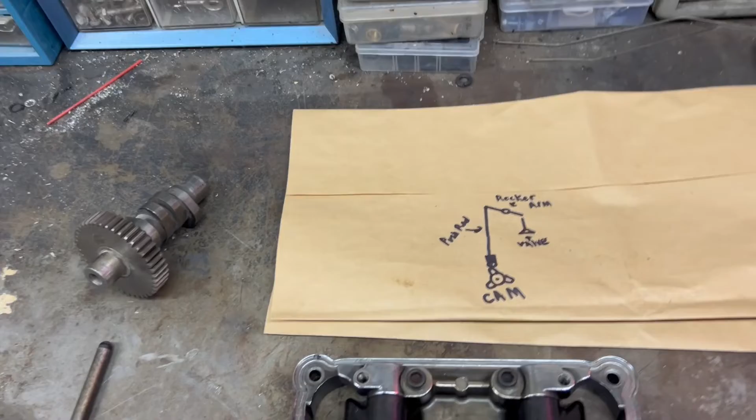Going over the basics here with this very crude drawing, you have your camshaft, and these are the lobes of the camshaft. You have intake lobes, exhaust lobes, intake lobes, and another exhaust lobe back here.

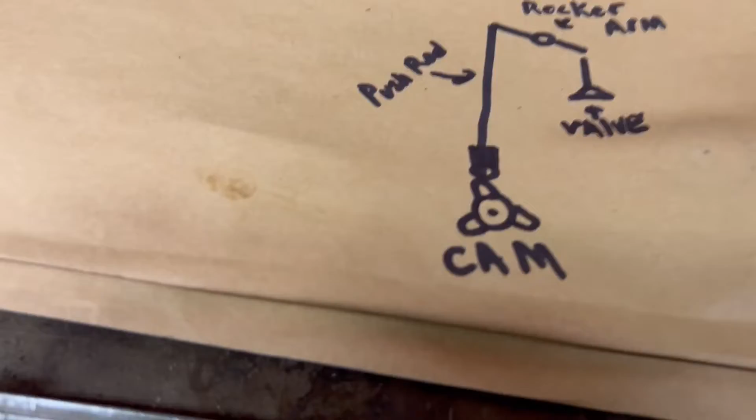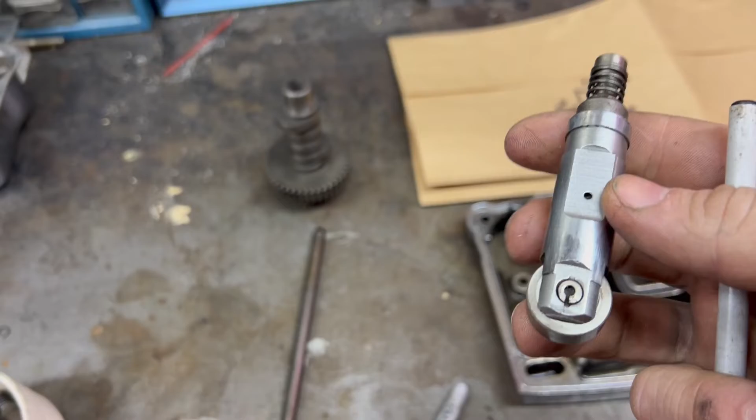As your engine spins, the cam will come up onto a lobe, whether it's intake or exhaust. What rides on the camshaft is your tappet or your roller, and it will ride on this as it spins. This sits in the lifter block and it will go up as it comes up on one of those lobes, which pushes your push rod up right here.

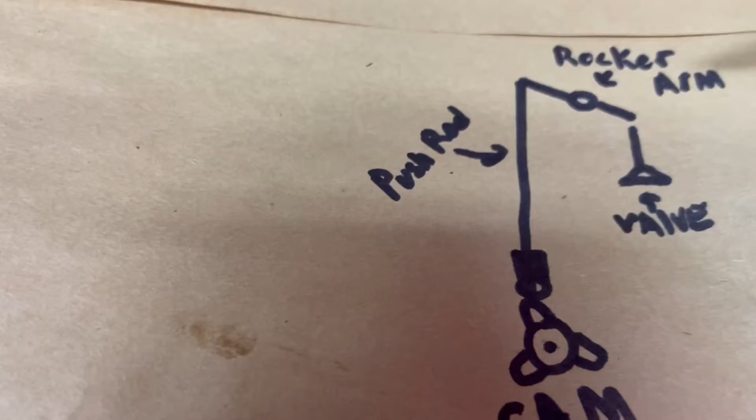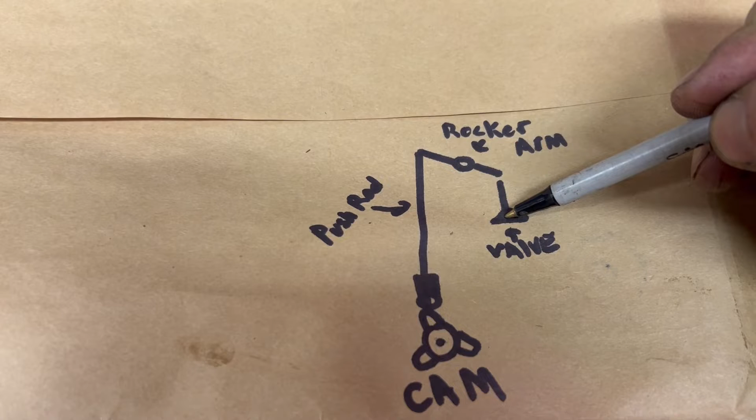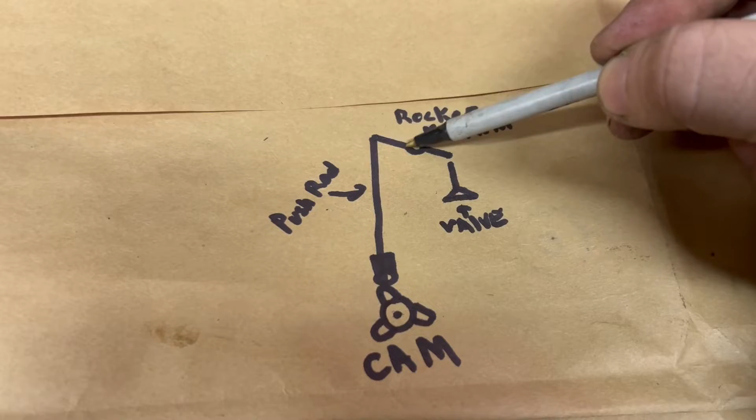So the cam comes up, pushes this up, which in turn pushes this up, and then it goes to your rocker arm inside your head. When this comes up, it pushes this down, which opens your exhaust or intake valve. Then as it comes off the lobe while spinning, it works in reverse, sending the push rod down, the rocker arm down, the valve up, and it repeats.

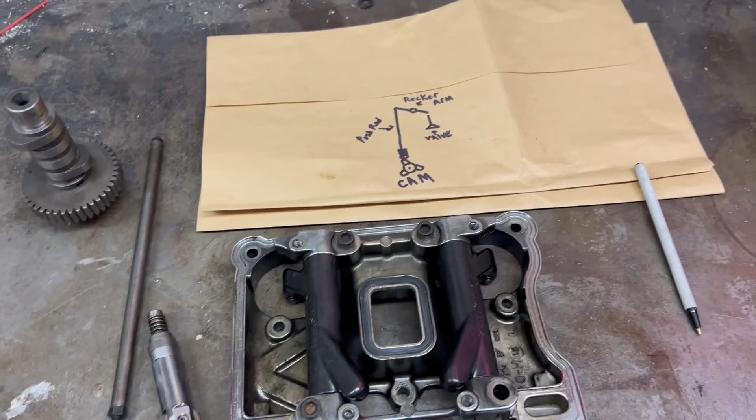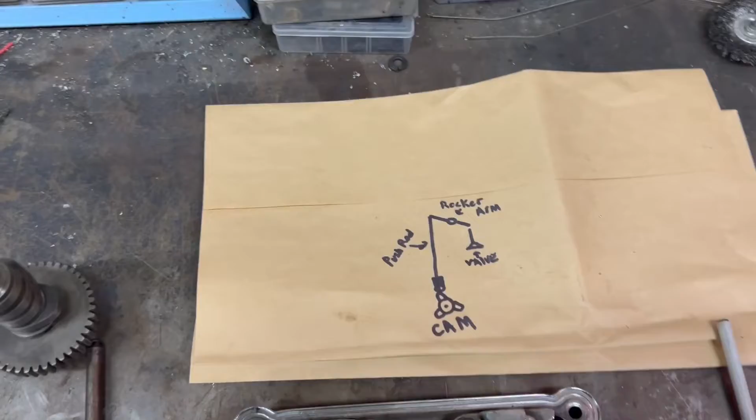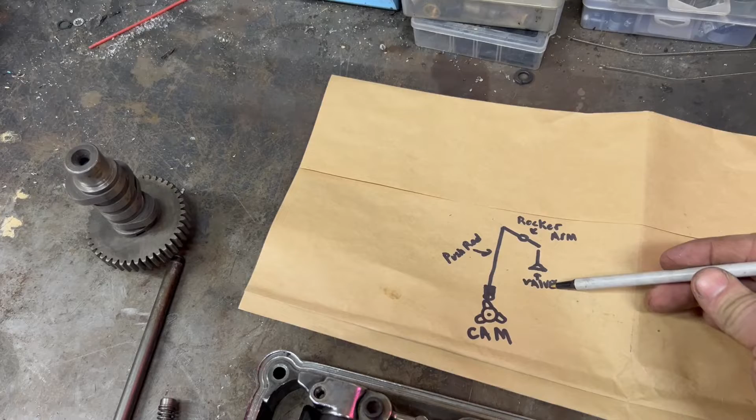So today we'll be talking about setting the proper valve lash in your push rods, to make sure all of this goes smoothly. Because if you have any space in between any of these points, your valve isn't going to open to its full potential. And if it's too tight, the valve will never seat in the head, which allows compression to escape and your bike will run very poorly.

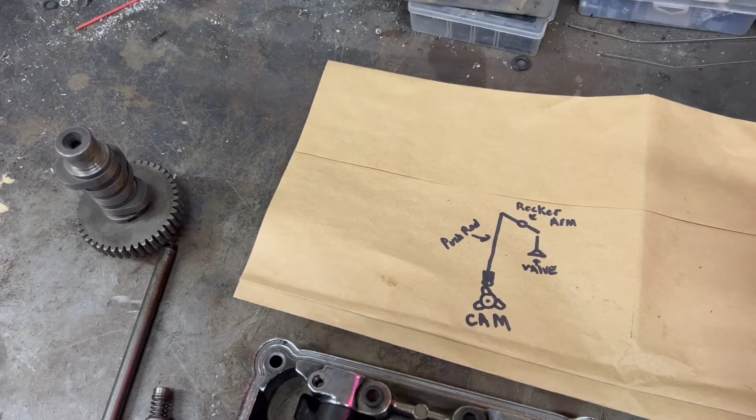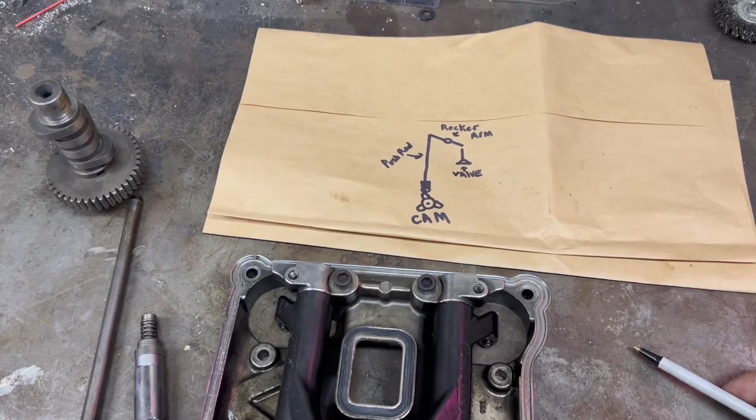It'll be really hard to start. So it's super important to get this set properly, and that's what I'm going to show you guys today with a solid lifter push rod adjustment.

So you might be asking yourself, how do I even know if I have solid push rods, and what push rods do I have? That's a good question, because it's important to know before you start adjusting — if you do it the wrong way, it could do serious damage to your engine. So let's go over a couple different setups so you can tell the difference.

We'll go over a couple of the differences here. This is your lifter block — it sits on your engine, and you have two of them, front and back. This is your lifter or tappet, it slides up into here. It's kind of hard to do one-handed. It goes up into there like that, and this is what you'll see when you pull your push rod cover off, which I'll show you how to do.

This is going to be the stock setup for shovelheads and some panheads — it'll have this setup here, and that's how you know you have hydraulics.

A good way to test if your bike is running badly, to see if they're good or not, is if the bike's pumped up with oil and you can squish that spring down like that — then this little unit here is bad and you'll want to replace that.